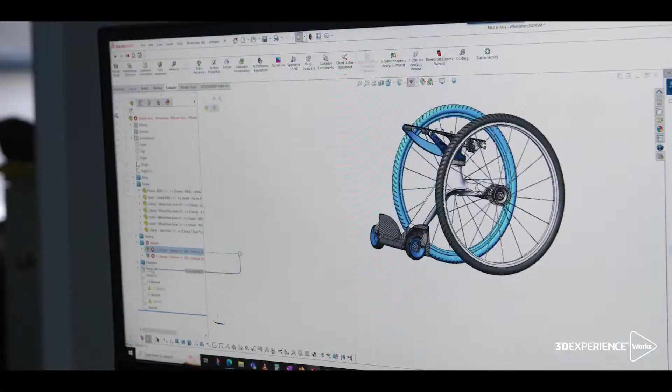Bowhead designers are passionate about taking you places that you've never been, or back to the places you yearn to reach again. A focus on amazing has propelled Bowhead from a business into an adaptive mobility movement.

To fuel this movement, founder and CTO Christian Bagg and his team use every tool at their disposal, and SolidWorks has been Bowhead's go-to solution from day one. As the company's grown, SolidWorks has scaled with them, playing a vital role in every aspect of Bowhead, from design and production to customer service and operations.

Using this incredible dataset, we're going to explore the new CAD features and 3D modelling tools available with SolidWorks 2024. So, if you want to improve your team's productivity by working smarter and faster with the latest SolidWorks CAD enhancements, watch the new capabilities covering everything from assemblies and parts to routing, structures, and even drawings.

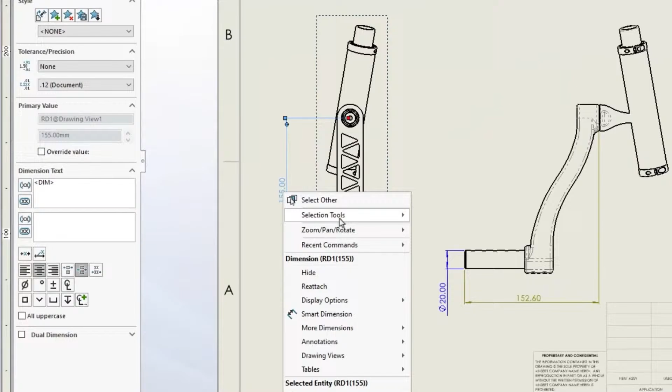SolidWorks 2024 has arrived.

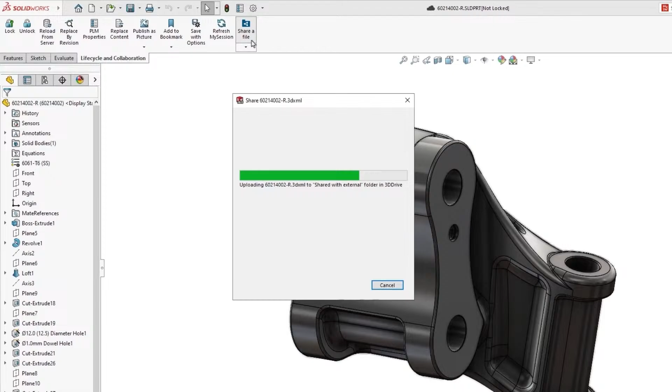With cloud services, there are convenient tools like Share a File that allow you to remove the friction associated with sharing your designs, both internally and externally. Simply indicate whether you'd like input on the design, who you'd like to share your design with, and the feedback you're looking for. No file attachments or viewers to download, just a notification with a link allowing controlled access to your content directly from a browser on any device.

Dimensions can be taken, sketches can be made on the model to communicate design ideas, and markups added from multiple views to convey manufacturing suggestions. When finished, comments capture the markup and can be used to request additional information.

The best part is that you never have to leave SolidWorks. You can access any comments and markups right from the task pane. They not only contain the annotations that were added, but remember the orientation of the model as well, making it easy for you to understand the feedback.

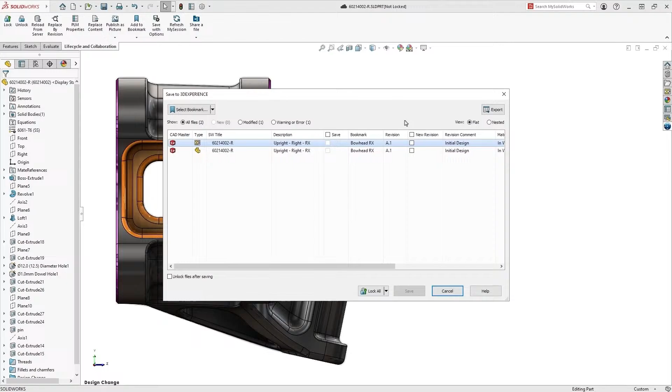When it's time to make design changes, Cloud Services has built-in revision management that's as easy as saving the model and drawing. Simply add a note indicating what's changing, and your new revision is securely saved to the cloud. On the drawing, the revision table automatically updates for you with your change comments. Plus, you can track the progress of your designs by simply updating their status. No need for moving files to new folders, zipping datasets up, or coming up with creative file names. Just convenient tools designed to make your life easier and keep you focused on your designs.

With the new revision available, you can choose to share the drawing as a PDF with your supplier, or update the existing share with the new design.

Either way, you're in complete control of the access. The 3D Experience platform is your online product development hub. Powerful search capabilities allow you to find and assemble your designs with ease, fully supporting your favourite features.

Such as mate references. When it comes to collaborating with your team, each member can lock the portion of the design they're working on, ensuring your design changes aren't accidentally overwritten. And because your designs are securely stored on the cloud, you can access them from anywhere.

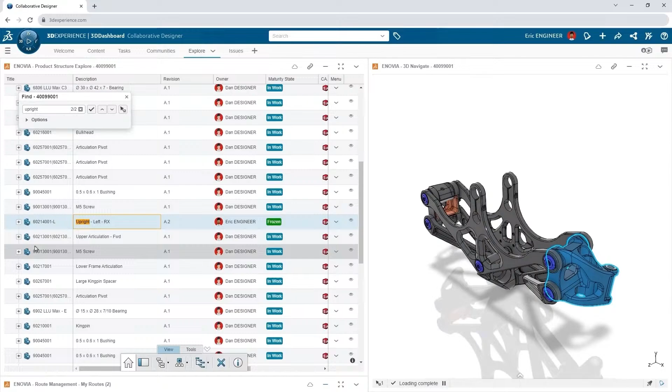Preview your designs right in the browser while taking advantage of powerful capabilities like comparing your design revisions. Explore the structure of your design with built-in search, allowing you to easily navigate to the component of interest. Focus on the part and access all the associated custom properties without ever having to open SOLIDWORKS.

When you're ready to bring more structure to your engineering processes, Cloud Services has you covered. Use the convenient tags to filter your designs by status and formalize your release process by dragging your designs into a route. Routes can have linear or parallel approval tasks assigned to members of your team.

Once the tasks are completed, you'll have full access to the sign-off history and the route will automatically update the status of the attached designs. Not only can you manage your approval process, you can also track and resolve design issues as well.

Unlike traditional lists, these items can be visualized right on the design. Location tags provide feedback on what the challenge is and who identified it. Detailed descriptions and recommended actions are outlined and can be updated with the action that was taken and the resolution.

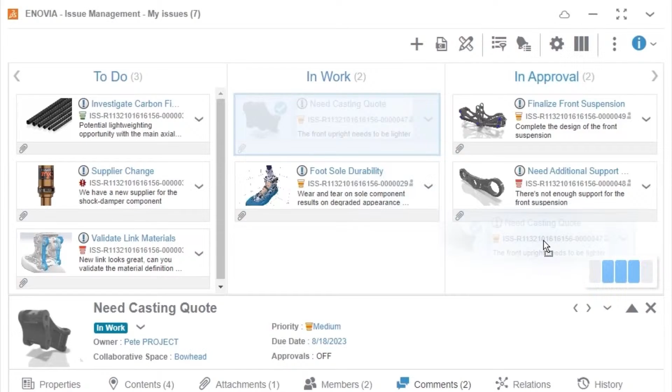The CAD items are referenced, and to ensure no one is duplicating work, the issues can be assigned to specific members of your team, and comments allow for social feedback that remains connected to the task at hand, not lost in an email. When completed, you can update the issue with a simple drag and drop and export a pre-formatted presentation to update your team in your next design review.

And that's just the start. Cloud Services opens the door to next-generation design tools, powerful simulation, and intelligent manufacturing that can accelerate your throughput. Keep your focus on design with Cloud Services, part of the 3D Experience Works governance portfolio, and available with new and upgraded SOLIDWORKS licenses.

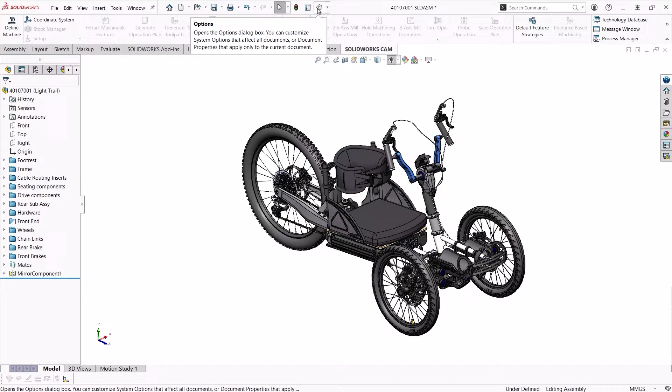To enable this option, we can open our options menu and on the System Options tab, we can select Performance. Finally, at the bottom of the page, we can activate the Hardware Accelerated Silhouette Edges. This option will help you accelerate the displaying performance of your models.

Another great feature added to SOLIDWORKS 2024 is that now you can select which coordinate system to use as your origin when saving an assembly or a part as a step file. To do this, we will open the Save As dialog box and select the step file type.

You can notice that a new drop-down menu has appeared where we can select which coordinate system to use as the origin for this new saved part. That's a huge performance increase for 2024, and being able to save as with a different coordinate system will really help when collaborating with other CAD systems.

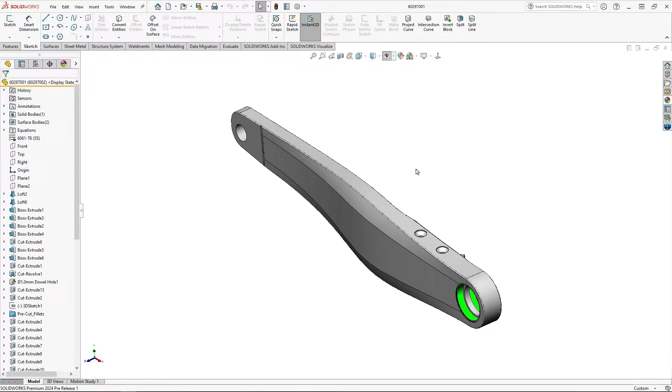In here we can select to save the part in either 2022 or 23 format. It's important to point out that if we were to save this part in a 2022 format, then this wouldn't work with any 23 or 24 new features used in the creation of our designs. That said, it still is an incredibly useful option when dealing with other SOLIDWORKS users who may be a year or two behind in releases.

When using the Cut Revolve feature, you can take advantage of a new option. We can now flip the side to cut, just like we can when using the Cut Extrude tool. This allows more flexibility when using sketched features by retaining the inner portion of a sketch and discarding the region outside of the sketch.

New in 2024, we're now able to create cylindrical bounding boxes alongside rectangular ones. These are super useful with bodies including cylindrical geometry, such as rotational, circular, or turned parts. Using this helpful new enhancement, we're able to take our new design and calculate the bar stock that would be required for manufacture.

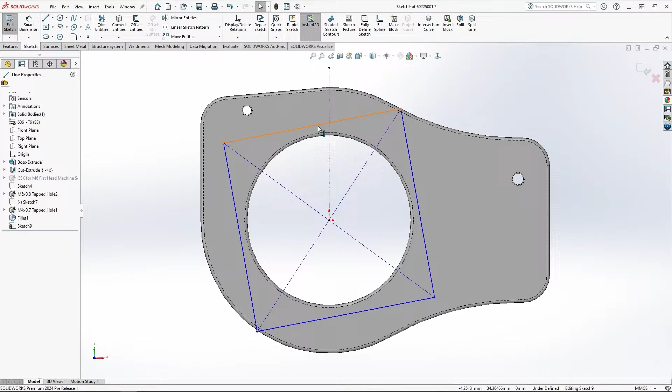There are lots of different ways that we can apply dimensions to our sketches to ultimately control them, but normally you have to first initiate the Smart Dimension command. Well, in 2024, we can now toggle a system option to preview the dimension whenever you select an entity. From here, you can simply use the manipulators for Instant 2D, or just double-click the value to change it.

This year, a really nice enhancement has been made to the Hole Wizard. When we go into the Hole Wizard and explore the Positions tab, we are greeted with an option to use an existing 2D sketch that already resides in the part. These sketches can be used to position and automatically create the holes at all endpoints, vertices, and points.

The sketch options specify the geometry used to automatically create the instances. The two options are Create Instances on Sketch Geometry, which is enabled by default. This will position holes at all endpoints, vertices, and points of the sketch geometry. The other option does exactly the same, but for construction geometry. You can also skip hole instances, making it super quick to eliminate unwanted copies.

Helpfully, if we were to delete a Hole Wizard feature, we can choose to retain the original hole position sketch.

At first, being able to make a multi-body part from an assembly might not be seen as that important. We already have the ability to utilise Save As Part, and even have assembly features that we can use. However, these have their limitations. For example, assembly features are relatively limited in the types of features you can actually use, and most are specifically for material removal.

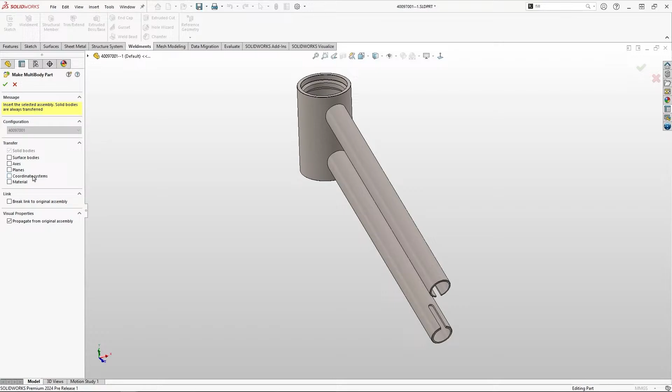Additionally, you can import the assembly axes, planes, and even coordinate systems, as well as the material of the bodies. In this particular example, by simply selecting the faces that we want to be welded together in our new part, the Weld Bead tool will create solid geometry to replicate the bead itself, and because it creates a solid body, we can see them in the cut list folder and can apply the correct material to them, allowing for an accurate weight for our assembly.

In SOLIDWORKS 2022, a great new tool called the Stud Wizard was introduced. This time-saving tool quickly turns cylindrical bodies into fully customizable stud features. Not only does it add the appearance of thread, but it also applies the correct PMI, or product manufacturing information, to the feature too. A nice improvement has been made this year by allowing you to apply the feature to a shaft that has the same diameter as the thread itself. In early releases, the thread diameter had to be smaller than the shaft, which made the workflow a little more involved.

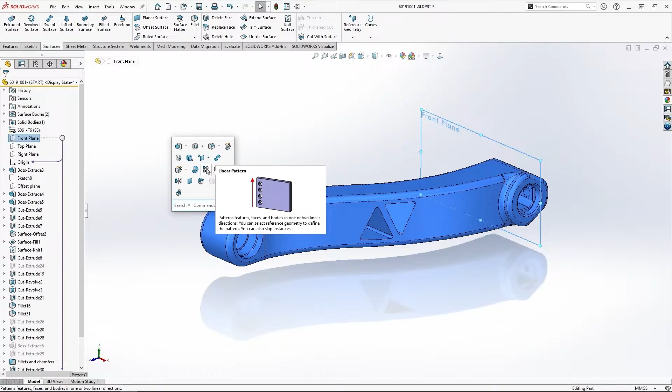Now for me, this is my favourite enhancement this year, in fact possibly for a couple of years. We can now create symmetric linear patterns just by ticking a box. No more selecting an additional direction, no more copying of dimensions or instance numbers, and no more ticking the pattern seed only toggle box.

Here, we're using a component from the bowhead assembly to show how easy it is to take a seed and then pattern it in two directions at once, but with symmetry. We'll first select the feature or features that we want to be our seed, in this case the weight-reducing pockets that we've removed from the part. We'll then select the direction of the pattern, followed by the desired spacing and instance numbers. Finally, we'll select the new option to include symmetry. By selecting this option, SOLIDWORKS creates a symmetrical pattern, but simply using direction 1 parameters.

When designing parts for moulding, it's often useful to have physical geometry to represent any shut-off surfaces. For example, here we want to capture the surfaces that would be required as a part of the tool design, as these triangular cutouts pass all the way through this part.

Previously, this would have been pretty difficult, but new in 2024, we're able to do this easily with a new option within Untrim Surface. Firstly, we'll create a copy of the front surface of this part by setting the offset to 0 within the Offset Surface command. Nothing new so far. However, this year, a new option to exclude the parent surface has been added to the tool, meaning that we can now create just those shut-off surfaces that we require with ease.

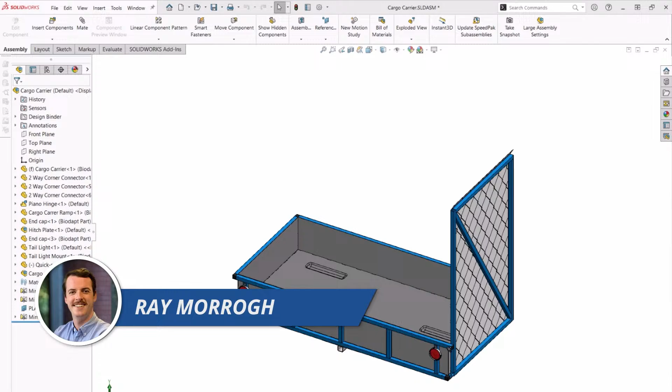There are some great new features in SOLIDWORKS Sheet Metal 2024. This cargo carrier attaches to the trailer hitch of a car or truck and can be used to haul the Bowhead RX around to nearby trailheads and rides. The entrance swings open and turns into a ramp so that the Bowhead can be rolled on and strapped down for transport. You can see that there is a diamond plate sheet metal liner with some indents for the wheels to sit in. Let's see how we use some of the new features of SOLIDWORKS Sheet Metal 2024 to help design this liner.

Taking a look at the liner, we can see that it's incomplete and still needs one of the side plates to finish the design. We are in an assembly and all of the sheet metal parts are connected using the tab and slot feature. Let's use Copy with Mates to copy the long side to the other side of the liner. We'll repeat this first mate and use the front and right assembly planes to finish mating this part in place. When zooming in, we can see that there are tabs from the copied part, but no slots on the adjacent sheet metal parts.

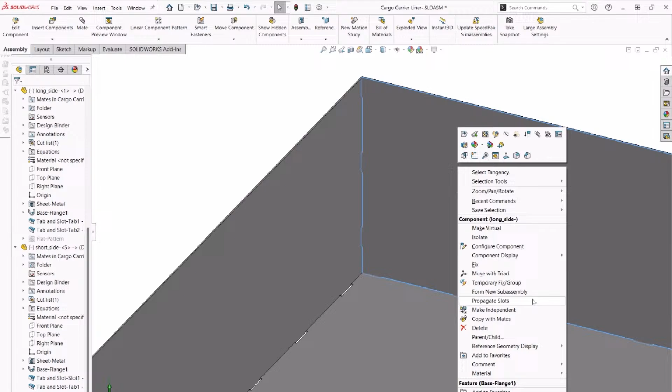Now in 2024, we can right-click the copied part and select the new Propagate Slots option. We can choose which slots to propagate or simply choose all instances. Now when zooming in, we can see that the slots have been propagated to the adjacent parts. This is a huge time saver, since we can now reuse the tab and slot feature in assemblies.

Now let's open the base plate and add the wheel indents. We can see that there is a fully dimensioned rectangle sketch already created. With it selected, we'll click the new Sketch-Based Stamp tool. We can now add dimensions to build out the dimensions of the first stamp.

First, we'll define the depth of 20 millimeters. Then we can make sure that the tooling can be easily removed, so we'll add a 5-degree outward draft. Next, we can control the die and punch radii of the tool. We'll set those at 20 and 10 millimeters respectively. Finally, we will turn on the punch side corner radius option and set that to 15 millimeters.

The new stamp tool is super powerful, and any closed contour sketch can be used to create stamps. In many situations, the stamp tool can be used instead of forming tools, which will save time and effort. There is another sketch in the tree, which is simply 2-dimensioned points on the base plate. Using a sketch-driven pattern, we can pinpoint the exact locations of the other 2 wheel indents and pattern the stamp.

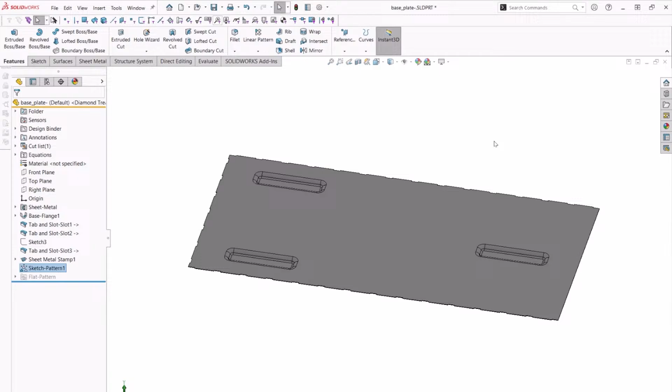Going back to the cargo carrier, we can see that there are two taillights that are mounted on the outer frame. Let's see how the sheet metal mount was designed using new functionality in SOLIDWORKS 2024.

This part is just an extruded, thin-walled cylinder. For this to be a flattenable sheet metal part, we would need to rip it first. Now, in 2024, the rip command can be used to rip thin-walled cylinders and cones.

Simply choose the rip command and click the inner edge of the cylinder. Clicking a point will define where the rip feature will be. The rip dimensions can be defined by a linear distance, or we can dimension it by degree. We'll set this rip cut to 3 degrees and choose symmetrical so that we know it is centered on the point. We also have the option to offset the rip as well.

Now, by using the insert bends command and choosing one of the inner edges of the rip feature, we can define this as a sheet metal part and see the flattened geometry.

By expanding the utility of the rip command, it is now easier than ever to convert thin-walled cylindrical and conic geometry into sheet metal parts.

Hiding the sheet metal enclosure will allow us to see the structure system in full, including the corner connectors. Here are some of the great changes that have happened to structure systems in SOLIDWORKS 2024. We'll create this structure system easily using these surfaces to gain our 2 rectangle elements.

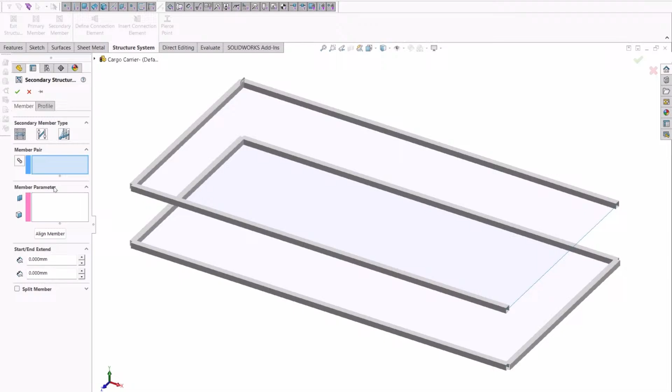Deselecting the edges will remove the associated weldment from being created. Secondary members are a breeze and only require a selection of the primary and secondary members and any planes that we may also want to build members with.

If we neglected to deselect previously, simply selecting the member profile once it's been created and hitting delete will remove that member from our structure system.

When exiting the structure system, we'll begin to notice some of the changes that have happened to structure systems in SOLIDWORKS 2024. The property manager will change to corner management.

We can now automatically apply corner grouping based off of a reference plane, like what we select here. In previous releases, we could group corners, but this was a manual process. It could be time-consuming working with a large weldment system.

There are several new UI elements, and we have a new option as well, Open Corner. This addition allows for greater flexibility when creating your new weldment structure, and the possibility of adding additional unique end connectors, besides the other options that have previously been available.

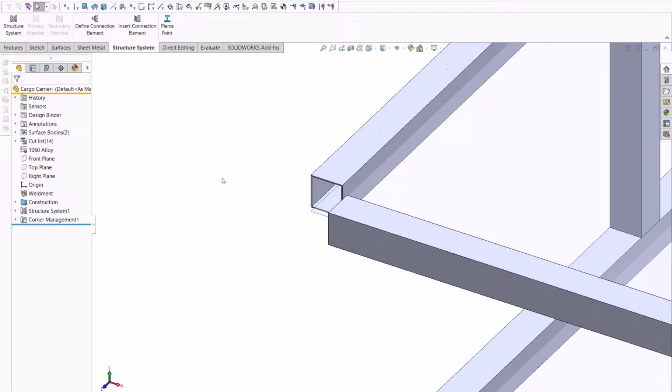Another great enhancement for 2024 is the ability to allow units for properties. Taking any items in our cut list and selecting the properties will allow us to add those units to our custom property.

This isn't just for bodies or members on our cut list, but will also be for file properties. A good example is the adjustment of the mass. Simply right-click and change the units in the property window.

We can now finish this weldment by mirroring several of the bodies from our cut list.

With SOLIDWORKS, it's easy to create complex weldments using more than just sketch lines, and Structure Systems has great tools to be able to do this quickly. That stamp tool is a huge time saver, much faster than creating a form tool, and great to see the tab and slot command now more flexible than ever.

Now, working with large assemblies gets easier every year, and this year is no different. To show you what's new in assemblies for 2024, let's hand over back to Graham.

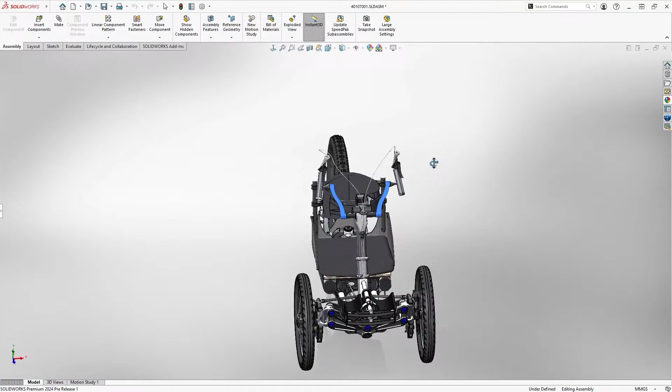SOLIDWORKS 2024 brings users more productivity when creating, organizing, and sharing assemblies. Let's take a look at the bowhead's front steering subassembly and check out some of the top enhancements.

For users that leverage configurations, configuration descriptions are now shown alongside the configuration name in the Insert Part pull-down menu. This helps ensure proper configuration selection every time.

SOLIDWORKS 2024 also adds a new option to fix, float, or fix the first when inserting a new component. This option is sticky and gives more flexibility to how you wish to work when placing components.

After selecting the green check mark, the steering knuckle is located at the origin, but in a floating state, allowing you to move right into position and start mating.

SOLIDWORKS offers many ways to create mates outside of the standard paperclip tool. Using Alt-Drag will automatically introduce a mate, or using Windows Control-Select will prompt the Quick Mate toolbar.

With each release, SOLIDWORKS is constantly evolving mates. 2024 has overhauled how the width mates are solved, and for advanced constraints, the width and tab selection fields have been renamed. In 2024, no matter how you select your tab or width selections, your constrained width mate will always solve correctly.

Predefined mate references offer another way to speed up assembly design, but sometimes can fall short of proper definition, and concentric mates are left free to rotate. Now, in SOLIDWORKS 2024, mate references have the option to be created only when a named reference exists, improving overall performance when placing.

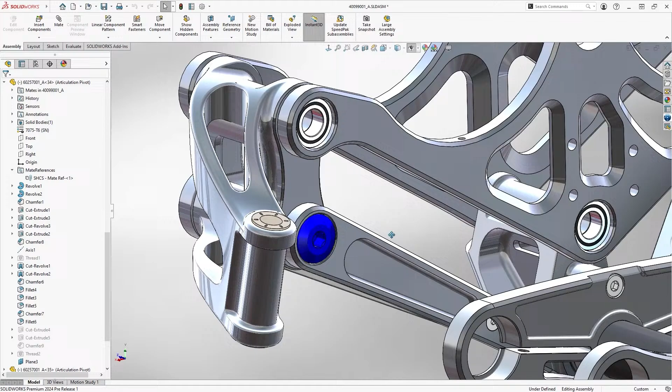An option to lock rotation has also been added for concentric mates. When adding a component with a named mate reference option selected, and where multiple paired named references exist, a drop-down list is presented with all possible options, making for precise mate reference placement.

With a total of 10 articulation fasteners added, it's time to clean up the assembly tree. Users have long had the option to add in component references, but this process can be repetitive. New in SOLIDWORKS 2024, component references can be accessed from the top level of the assembly, where information can be added, removed, or modified through a single table. Any duplicate inputs are flagged, and these component references can be leveraged in drawings, such as in a bill of materials or text callouts.

It's common practice to share files, and even more common to want to restrict intellectual property on the shared files. SOLIDWORKS 2024 now offers an even more streamlined approach to defeaturing models through a rules-based approach. Accessing a list of user-created rules, this particular rule looks at a custom property saved to the file and simplifies each part of the model accordingly through a silhouette defeature process. After less than a minute, the model is automatically defeatured and can be saved as a new configuration or as a new part altogether.

Not everyone is working on the latest build of SOLIDWORKS. Workflows such as saving out as a neutral file type, such as STEP or Parasolid, are common for backwards compatibility. That is no longer the case in SOLIDWORKS 2024. Assemblies, parts and drawings can now be saved back 2 releases. With previous release save, mates are retained along with configuration information, metadata, exploded views and much more.

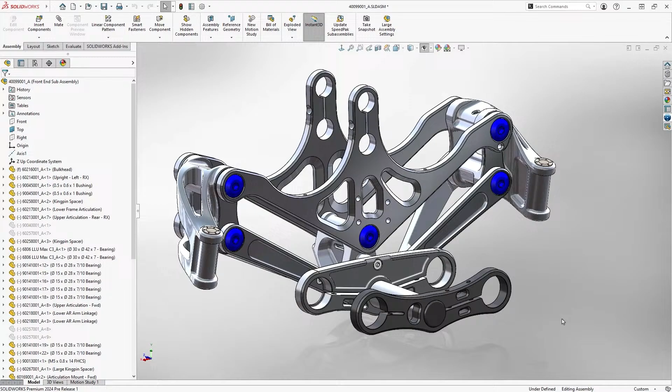SOLIDWORKS 2024 also incorporates XR or Extended Reality translators for saving CAD data to industry standard GLTF or GLB file formats. These formats can be consumed by many industry standard softwares to assist in composing AR, VR or XR experiences.

Importing STEP files is a common translation between CAD systems, but for large STEP files this can be a time-consuming process. SOLIDWORKS 2024 offers a new STEP file filter. This allows you to preview a STEP file and all of its components, then make selections of which files you wish to import and run the import, giving up to a 30% improvement on import time on translating large STEP datasets.

And finally, automatic mate repair has been expanded to include component patterns. Opening this rear wheel, we can see the spokes are now missing the edge that was initially used to drive the pattern. This can easily be cleaned up through the in-context toolbar and selecting the repair option. The process looks for a similar entity to reattach to the feature, allowing for a fast and efficient way to clean this up. A quick rebuild, and we're all done.

Whether it's day-to-day assembly operations, defeaturing files, or collaborating with older releases of SOLIDWORKS or non-SOLIDWORKS data, 2024 is sure to bring more efficiency to your assembly process. Some fantastic new assembly workflows available in 2024. These will really speed up large assembly design, documentation, and collaboration.

Let's see what's new for drawings. We'll begin by opening up the drawing for this mounting plate. Let's add some dimensions to this front view. Chain dimensions are useful for creating a stack of dimensions relative to each preceding feature. These dimensions now come in aligned collinear, reducing otherwise manual cleanup steps. In tight spots, where there may be overlap, a new system option automatically offsets dimension text.

On a busy 2D drawing, it can be difficult to tell what entities a dimension attaches to. Now simply hovering over a reference dimension will highlight its attaching entities, whether they be model edges, construction geometry, or vertices. This improves drawing clarity and helps you carry forward your design intent from the model to the drawing.

Sometimes you may need to manually override a dimension. That's easy to do right from the Property Manager. Any overridden dimensions can now be highlighted with a user-specified color. This behavior is controlled by Document Property. I'll use the document search to find it, and here it is all the way at the bottom of this screen. As you'd expect, the choice of highlight color is set as a system option.

Restoring one or more overridden values is easily done through the right mouse menu.

Collaborating with other SOLIDWORKS users who may be on previous software versions can be a challenge. It's now possible to save your drawings, parts, and assemblies back to prior releases. When you save the drawing, it will also collect any reference documents. Append a suffix or prefix, or use the advanced options for additional control over the file names and locations.

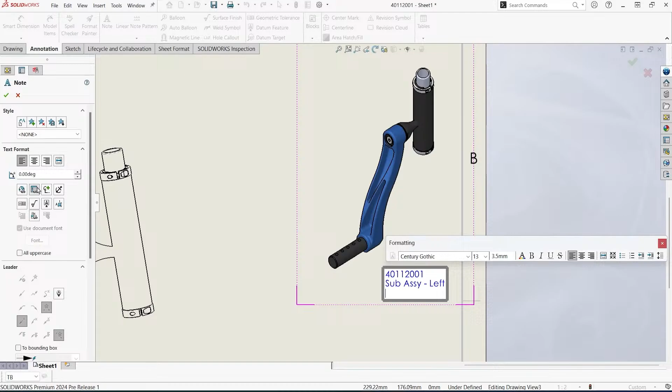I'll bring up my recent files list using the letter R shortcut and open up this subassembly drawing. I'll create a new note attached to this isometric view. For 2024, the link to the Property Manager dialog stays open so you can create text strings composed of multiple property links. This is a huge time saver for creating compound notes. And as you'd expect, when I switch the model configuration for this drawing view, the custom property information updates seamlessly.

However, changing the model configuration on these views causes a few of my reference dimensions to go dangling. Now you can simply right-click on any dangling drawing dimension and choose to reattach. The red X indicates an entity is missing, so now we just pick a new reference. Now my drawing is complete with a minimal amount of rework.

The latest release of SOLIDWORKS offers a number of enhancements to DimExpert and MBD. This part already has a DimExpert dimension scheme, but depending on model orientation, the attachment points of various DimExpert annotations could appear buried within the part. A new option in System Options Display enables DimExpert dimensions to display on top of the model. Now you can see the DimExpert annotations stay on top of the model regardless of the orientation. That looks a lot better and should eliminate any ambiguity.

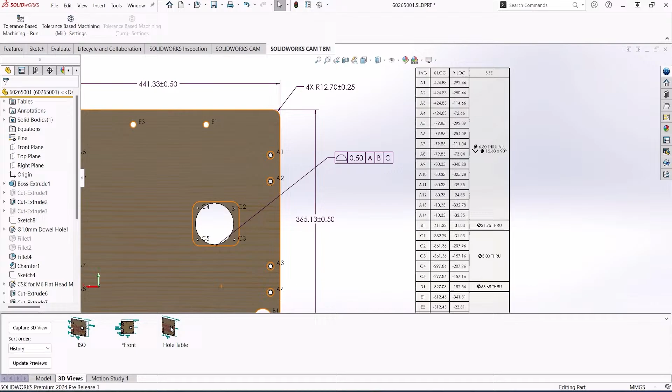Hole tables on 2D drawings are a popular way of reducing drawing clutter for multiple hole sizes and locations. I'll pick the front face to attach the hole table. Now I'll pick the X and Y axes, then these two faces to extract the holes. I'll choose to uncheck non-circular holes and slots, and then hit OK. Cross-highlighting from the table to the 3D part is also supported. When it comes time to save out a 3D PDF, hole tables will show in the 3D view, but you can also add a dedicated table on the PDF template.

Another benefit of MBD is the ability to create Step 242 output. This is a great format for sharing 3D data that has embedded PMI, which can be read downstream by software applications or used to program machines. New with this release, not only is the hole table included in the Step 242 output, but now you can also include any or all of the SOLIDWORKS custom properties for export.

Improving the editing interface for geometric tolerance frames has been an ongoing project for the past few releases. Double-click to select a tolerance frame, and then click again to bring up a Properties dialog. This release now provides the ability to display dual dimensions in geometric tolerance frames.

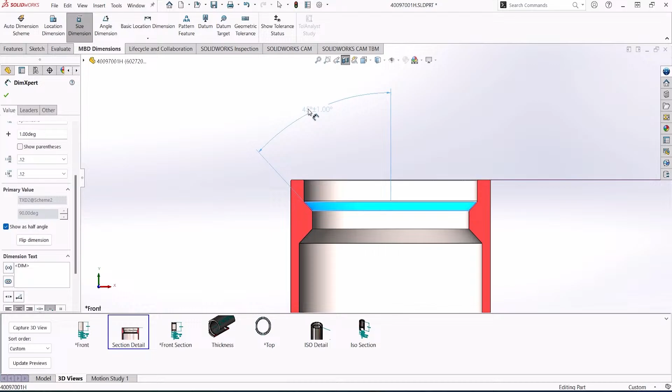Let's go to this section detail view. I'll add a size dimension to this angled face. I'll identify this as a conical feature, and this will create a dimension for the total included angle. What's new here is that we can now choose to display the dimension as a half angle. This is a more common convention, especially for turn parts. This behavior also applies if you use a DimExpert auto dimension scheme. For the datums, I can click on the existing datums in the model. Then select the angle dimension and set it to half display.

Also new for DimExpert is the ability to create a thickness dimension between two curved faces. It works pretty much like you'd expect. Switching over to this ISO view, I've added a split line to the top of this part. However, that causes this overall length dimension to lose its face reference. In the past, this would require deleting and recreating the dimension. Now, DimExpert dimensions can be reattached to a new reference entity, as long as it's of the same type. One last bit of cleanup, and this part is looking good. Much easier now to reattach those dangling relations.

If you frequently find yourself repeating the creation of models and documents, it may be beneficial to explore the use of DriveWorks as a design automation tool. This tool has the potential to streamline your processes and significantly accelerate your workflow.

We've seen some amazing new tools for design and documentation so far, and the good news is that there's still plenty more to come in the second half, including SOLIDWORKS Visualize, PDM, simulation, electrical, and some incredible new applications now available on the 3D Experience platform.

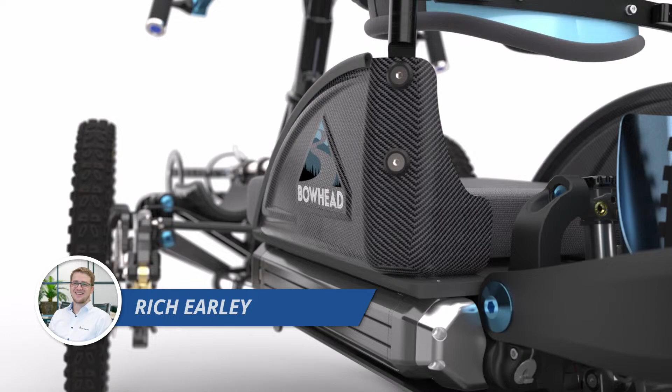Since its introduction in 2016, SOLIDWORKS Visualize has become a go-to solution for SOLIDWORKS engineers' rendering needs, creating photorealistic, engaging content directly from your CAD models. In this short video, we cover enhancements from the 2024 release, applicable for all versions of Visualize, whether using Visualize Standard, Visualize Professional, or Visualize Connected.

The biggest change for all users is the complete overhaul of the appearances, as the appearance format has been exchanged with Dassault Systèmes' Physically Based Rendering, or PBR, methodology. This approach is fast becoming industry standard within visualization and CGI, allowing consistent and seamless integration in both upstream and downstream visualization workflows. These appearances are created in a full DS-PBR model, allowing full controls to create complex and nuanced appearances. But that doesn't mean that the DS-PBR format is hard to use.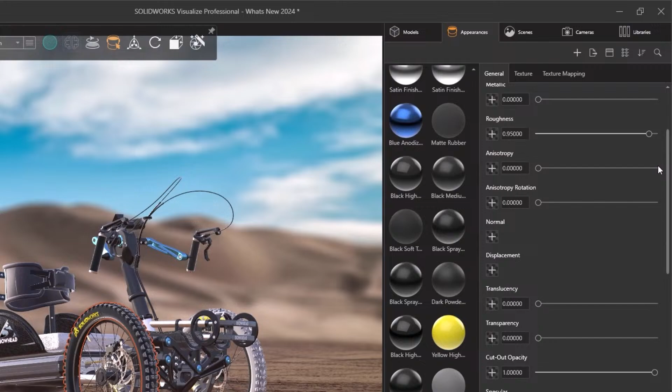Single texture maps can be simply dragged from Windows Explorer onto the appearance and pointed to a map slot. If multiple maps are selected, a format will reference common naming conventions and auto-load all maps to the correct slots for instant appearance application. Full control over textures and mapping is of course still present, with the addition of some delighters, such as simplification of the tint tool and basic image manipulation tools that allow for fine-tuning of the textures on the fly.

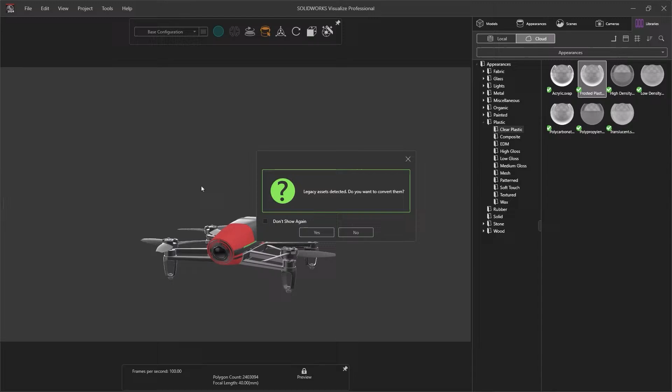Along with the appearance format change comes a whole brand new appearance library. This library comprises over 48% more appearances than the previous library, with more periodically to be added to the cloud library. If you created any existing custom appearance in Visualize, these will be automatically updated to the new file format as soon as they're used within Visualize 2024.

Setting up your scene can be a time-consuming process. Visualize 2024 dramatically reduces this with a revised manipulator. Graphically, the manipulator has been given a new clean design, featuring dynamic highlighting to ensure you select the correct translation, rotating, or scaling command. For power users, keyboard shortcuts have been added.

G, R, and E have been added, using G for grab or translate, R for rotate, and E for elongation, or the scale command. This can be taken further with additional keyboard shortcuts for the X, Y, and Z axis, represented by the respective letters. For example, we can translate this component in the Z axis by first selecting the G key, followed by the Z key for the direction.

This is then accessing the component's local coordinate system. However, at times you wish to select the world coordinate system. I will do this by simply double pressing the axis that you want to select. Complex scene setup should be even easier to create with the improved Move manipulator, with keyboard shortcuts adding quicker and more precision for users.

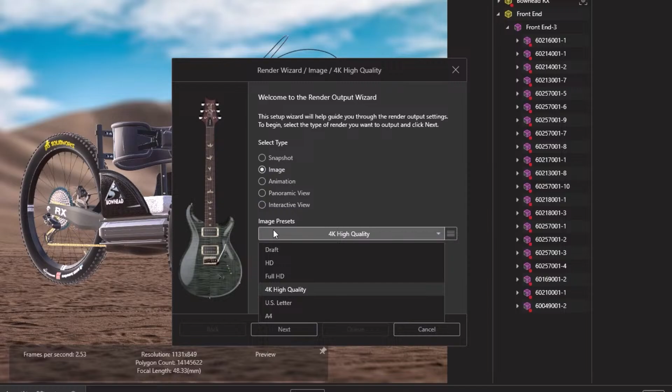The Output Tools menu has been replaced with the Render Wizard, an easy step-by-step interface with customizable output profiles. This includes all the same settings previously included, all within logically separated tabs. However, there's a few additional features that have been added. Now we have full control over which configurations, model sets, and even cameras we wish to render out, all within a single setup.

Export options have been added for interactive images, with the option to export animations, opening up all kinds of creative outputs for interactive feedback. These can be created from partial or whole existing animations. Interactive outputs can be previewed from the output viewer, as well as the option to directly upload them to the 3D Experience platform.

Sun studies have been a go-to method for creating realistic lighting conditions for a specific time, specific date, specific location in the world. This has been enhanced with the ability to choose a rotational vector by choosing either a component or rotating the visible compass. Any of these defaults can be saved as profiles, ready for reuse for the next project.

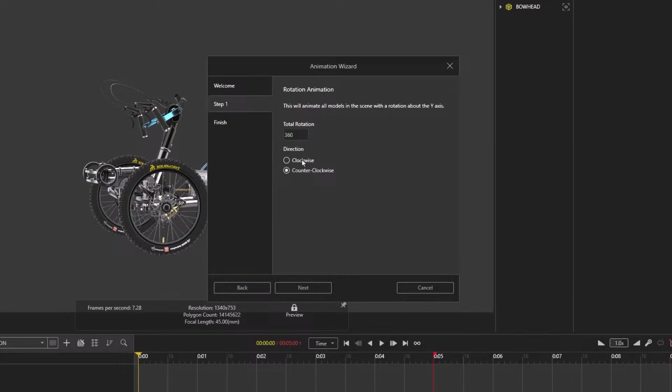Creating basic animations becomes even easier with the introduction of the Animation Wizard. From here we can generate automatic rotation, turntable animations, or even animate our sunlight environments, creating spectacular sunrises or sunsets.

This concludes the enhancements in Visualize 2024, bringing a host of tangible benefits, reducing the time taken to produce engaging content for sales, marketing, websites, and social media campaigns. Upgrade your Visualize 2024 today and bring your models to life.

Wow, Richard, Visualize looks incredible this year. The UI just got even easier to use, plus a lot more adjustments available for the more experienced user to create truly stunning visuals and animations.

Keep in mind that if you're looking to expedite your journey towards becoming a rendering expert, we provide training courses for Visualize as well as all of our products. Your design work is an incredibly valuable asset, so it needs protecting. With that in mind, let's hand you over to Terry to take you through what's new in SOLIDWORKS PDM 2024.

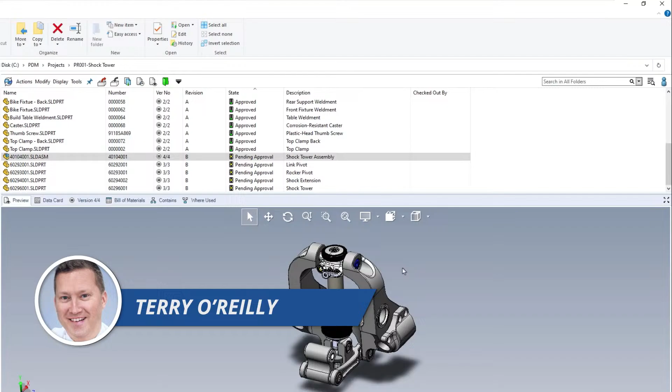Workflows have always been a great way to see where your design is in its development process. This assembly is pending approval, but needs to be transitioned back for additional features. Now in PDM 2024, when you transition a workflow, you have the ability to check out the design as you make the transition, making you more efficient.

Seeing a static list of parts and their properties can be insightful. However, with PDM 2024, we help you visualize those properties like never before. Assembly visualization now supports PDM properties. System properties as well as user PDM variables are now available.

Group and color by property, and then use the rollback bar to isolate parts based on their state. In addition, you can save the color mapping as a display state and continue working on your design with added insight.

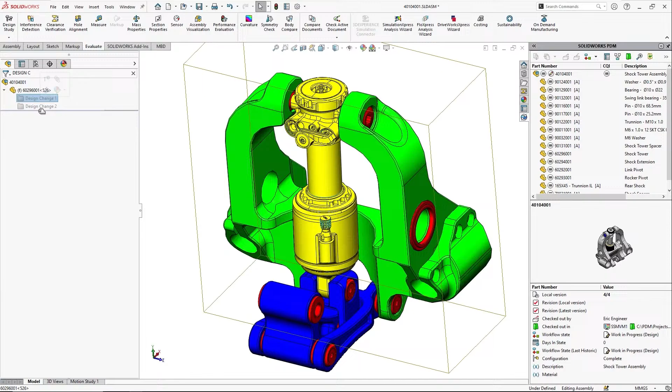Let's use the feature search to add the required design changes to this model. We'll finalize the design by checking them in and then release the design as Rev B.

PDM has always been about tracking the history of your designs. Now history records when the design has been checked out, providing a greater level of traceability. When accessing an old revision, you can now gain a clearer understanding of its status on the newly redesigned version tab. The top half of the tab provides insight into the status of the latest version available, while the bottom half provides you with information related to the current local version, giving you a clearer picture of the status.

For users of named BOMs, hidden columns now show in the BOM Compare as deleted. You can quickly unhide all hidden columns on the right mouse button menu, and it's easier than ever to edit multiple cells at one time. Overall security has been enhanced to ensure that reference data is blocked for those without permission on the Contains and Where Used tabs, and supports the table view as well as the tree view.

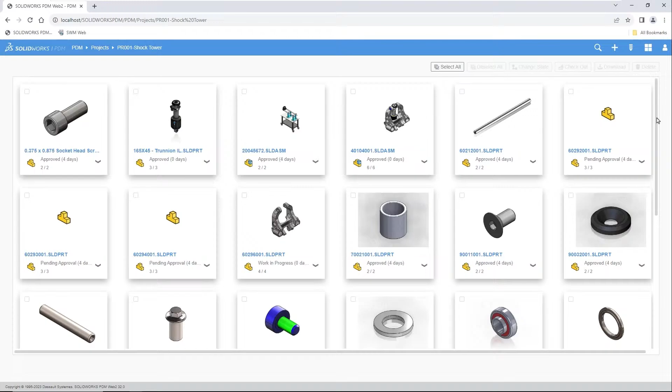Web2 now supports the grid view, making it easier to visually identify your designs in the folder and search views. Clearly understanding the makeup of a multi-body part is now easier than ever, with new icon indicators that exist not only in Web2 but throughout PDM 2024. The right mouse button menu allows you to seamlessly transition to any tab of a file, saving you time.

And if you need to access an old version, Web2 now allows you to select the version you want to download. For administrators, it's now easy to see the vaults that you're logged into. The license node has been split into license usage and server list, and a new administrative permission has been added for more granular access control.

With the introduction of assembly visualization support for PDM 2024, you can create variable display lists your users can access and easily control their permission.

Finally, organizing your workflow has never been easier. States that are no longer utilized can now be archived, and you can toggle the pane on and off on the toolbar. If you need to unarchive a state, simply drag and drop it.

With SOLIDWORKS Manage, you can create and edit bills of materials using a record-based approach, making you less reliant on the existence of SOLIDWORKS data. You can create a bill of material at any stage of product development and capture a manufacturing BOM, which is often derived from the CAD BOM but is different in some way.

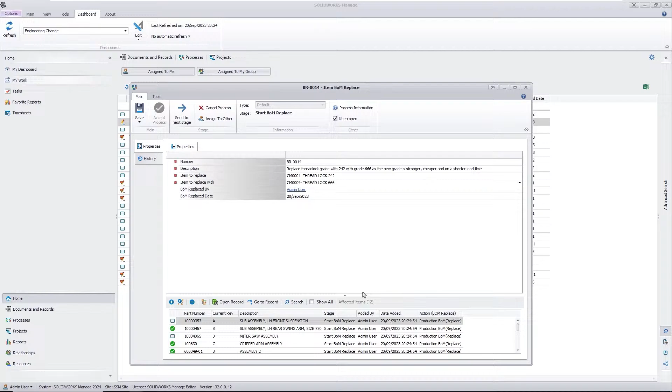In 2024, you can globally replace an obsolete component with an alternate part and update all its parent bills of material in one operation. In 2023, the bills of material are updated one at a time, so this great new enhancement is going to save significant amounts of engineering time.

In 2024, the SOLIDWORKS Manage desktop and web client includes a full eDrawing preview, making it much easier and faster to view component geometry whether you're working with bills of material or participating in an engineering change process.

With SOLIDWORKS Manage 2024, these enhancements and many more will improve ease of use, increase productivity, and promote better collaboration across your organisation. Some great enhancements to the user interface this year.

Lots of additional functionality for BOMs, transitions, and now support for assembly visualization. And that added checked-out-by information in the file history gives us an important new layer of traceability.

Simulation is an important part of the product development process for many companies. So to take us through this year's enhancements to SOLIDWORKS Simulation and Plastics, let's hand over to Alex.

SOLIDWORKS Simulation 2024 adds additional functionality to virtual connectors and options to speed up your simulation setup. We'll start by looking at the new simulation options that will help every user.

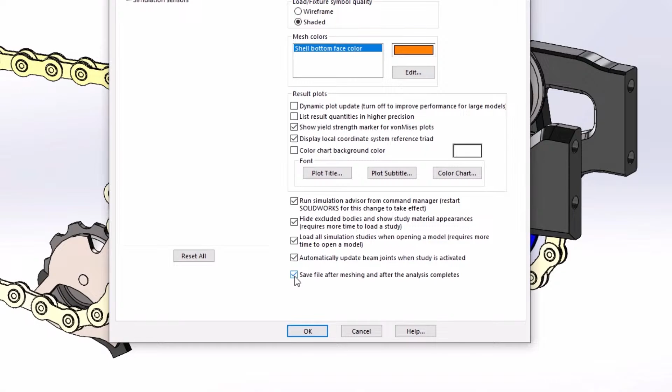In the general simulation options, you can now turn on new selections to automatically save the file after meshing and automatically save the analysis after the analysis completes. This is now in line with the behaviour of SOLIDWORKS Flow Simulation. These options will prevent data loss in the case of unexpected shutdowns or power cuts.

Also, under Solvers and Results is a new option to pick and choose what is copied, either include or exclude the mesh and results. This will save time and disk space.

Now, back to the model. This chain assembly is responsible for transferring power from the rider's arms to the assistive power unit and rear wheel of the Bowhead RX. You can see there are two chains running through the tensioner. Next to the chain is the chain roller guide. The roller guide is responsible for keeping both chains on the transfer cogs, ensuring that the chain doesn't slip off under power.

In this simulation, we're going to check the displacement around the roller guide and check the bearings and bolts are fit for purpose. The chain roller guide is mounted to the tensioner mount and houses two sealed bearings that are mounted to the roller guide axle.

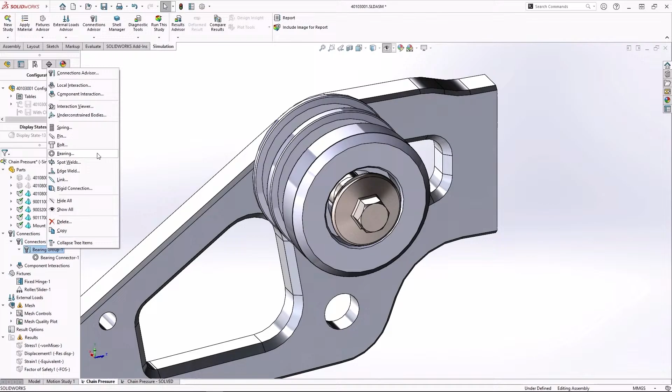We can now exclude the physical geometry for the roller bearings from the analysis, since we're replacing these with bearing connectors. One of the bearing connectors has already been created for us, so we'll now create the other connector. We will choose the outer face of the shaft and the inner face of the housing to define the location.

We can now choose the new option for distributed coupling. Distributed coupling allows for the faces of the attached bearing to deform, which delivers a more realistic representation of the bearing's behaviour. We will now add the lateral and axial stiffness of the bearing to define the new tilt stiffness.

In 2024 is the ability to define torsional stiffness as well. In this final dialog box, we can also specify exactly how much the shaft is going to be stabilised.

Now we'll add the chain loads to the roller guide. Split lines we use to locate loading at specific locations and directions. First, we'll use a load of 250 newtons to the hand crank chain and 150 to the pedal assist chain.

Next, we will quickly run this study. It takes under a minute to mesh and complete. So, let's take a look at some results.

You can see from this stress plot that the majority of the higher stresses take place on the bolted shaft, but everything appears below yield and within tolerance.

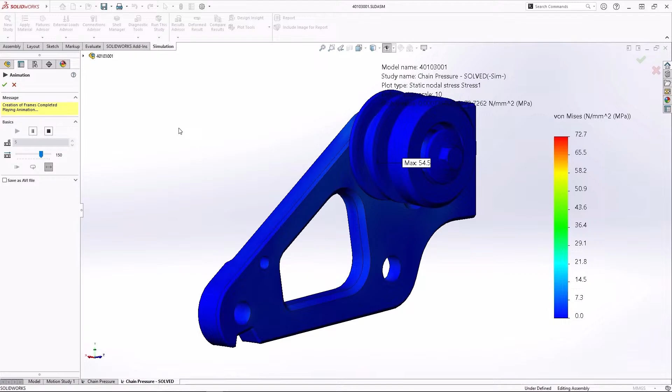When animating the results, we can see that the chain roller guide is moving as we would expect, and the deflection suggests that even under load, it's relatively mild, so the chain roller is doing its job.

These new enhancements to SOLIDWORKS Simulation in 2024 add even more flexibility to how you work and even more power to commonly used virtual connectors.

Copying studies is now faster than ever before, saving time by removing unnecessary data transfer. And adding even more detail to bearing connectors saves runtime and helps you get even more accurate results than ever, and greater insights into your design.

In 2024, SOLIDWORKS Plastics uses automation to speed up your analysis. We also have further injection location optimization options.

This plastic part supports the rider's calves when powering the Bowhead RX. It's a thin plastic part and it may be beneficial to have multiple gate locations to reduce cycle time and ensure proper mold cavity filling.

Now in SOLIDWORKS Plastics 2024, the Injection Location Advisor can automatically suggest multiple gates and their optimal locations. Users can also define the number of gates to use, and the advisor will then place those gates in optimal locations as well. On screen we can see a preview before we run the study of how this may look.

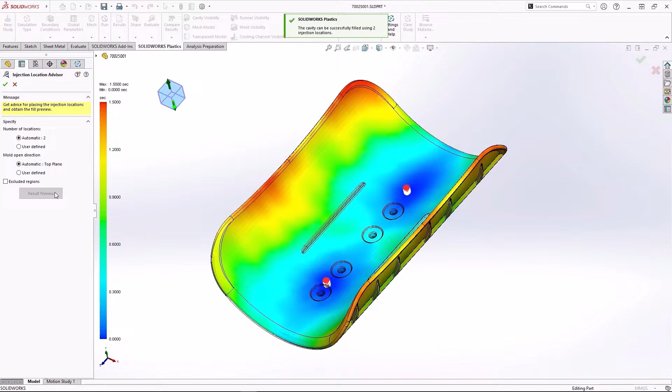Now, let's say you have another part like this cable cover, and you want to test multiple scenarios with different materials and different study types. The new Batch Manager makes it easier than ever to queue up a bunch of studies and run them all with one click. In the Batch Manager, you can now also choose what study type you want to run.

First, we select the right study setup. Then, using the new Simulation Type pull-down menu, we select the relevant option. You can choose any combination of fill, pack, warp, or even cool studies.

You can even designate the maximum number of CPUs for each study. This allows you to crack on with other tasks and not have your whole CPU used up by a plastic simulation. You could even start a second session of SOLIDWORKS and do some modelling while the studies are running.

When you're done setting up the Batch Manager, simply hit Run, or you can even choose a start time. In SOLIDWORKS Plastics 2024, we continue to use more automation tools and logic to help you get deeper insight into the injection molding process of your plastic parts.

Automatically saving the file after meshing and after the analysis completes gives us an added safety should things go wrong, a potentially huge time saver. And the new connector options add an extra level of realism to your analysis.

If you're uncertain about having the necessary skills and time to meet your simulation requirements, consider utilizing our consultative service. This service can be a valuable resource for one-off assistance or for reducing both the workload and costs associated with your project.

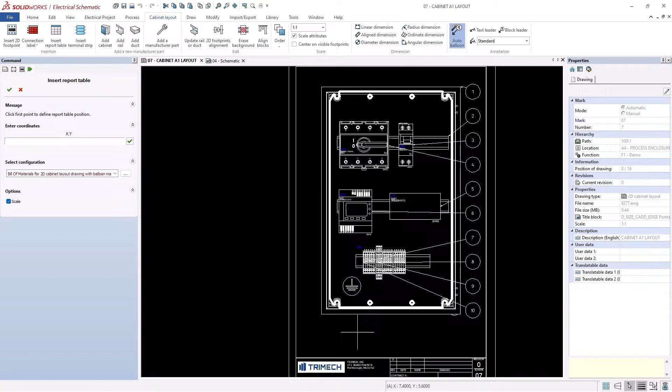And then we have the option to insert the report table as well. So I'm going to go ahead and insert this table at the bottom here. When looking at this table, we can see there's plenty of information here, including manufacturer part information.

Now we can save some extra time because SOLIDWORKS has made it so we can delete manufacturer part information, and that will fully clear residual terminal numbers at the component level. So we'll save some time when we're clearing manufacturer part information.

Another update SOLIDWORKS has included for us is representing component marks as a range in our reports. So what do I mean by this? Let's look at the table we just inserted. We have our manufacturer parts here, and we have our quantity and marks.

When we have a quantity count of 3 or 1 or 2, it's easy to fit the marks for those components in this single cell. But when we have something like our WAGO 1201 terminal blocks with 17 of them in there, each individual mark for those 17 iterations is going to expand the cell or change the whole format of the table.

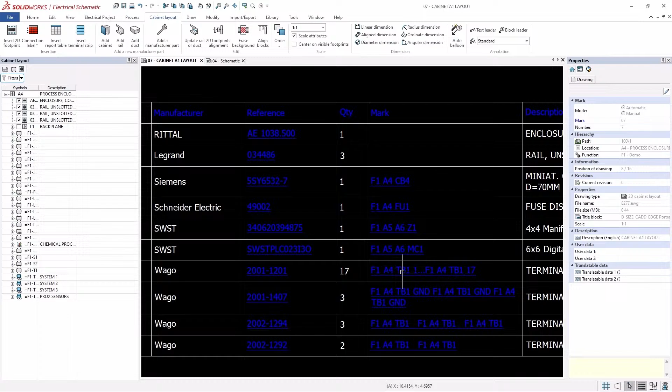The way we can represent this as a range is SOLIDWORKS has included an ellipsis to represent a gap between the first and the last iteration of those terminal blocks. So this makes it easy to format, and it makes it easy to understand and follow all the different marks in this table.

Let me open up a schematic and show some of the changes here as well. So we have a schematic here that represents our harness design, with connectors and wire harnesses or cables in between. One update SOLIDWORKS has made is being able to move symbols using the arrow keys on the keyboard. Now I can move up, left, right, down, adjusting how my symbols are arranged using only my arrow keys. That's a new function SOLIDWORKS has made easier for maintaining and modifying our drawing orientations or schematic layouts from within our keyboard shortcuts.

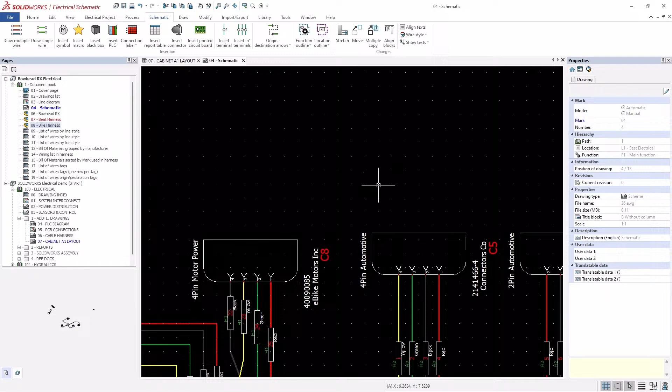One thing to take note of as well is as I zoom in and zoom out, my grid does a much better job at auto sizing. SOLIDWORKS has made improvements to that, especially making it easier for when we're working on larger displays. Having that scaling much quicker and more intuitive is definitely helpful when referencing our drawings and schematics.

Now let's take a look at the 3D updates for our electrical project. Here we can see an arrangement of connectors for electrical harnesses. The first update I want to show is routing active location only. In the electrical tab, we can see the location L2 and the components included in this location. When we automatically route that harness, we can select the option to only route the active location.

Let me go ahead and go to my route harnesses. From within this feature tree selection, I can choose to route active location only. When I do that, it's going to focus only on location L2 that I have active, and route that accordingly. Now we can see that this harness has been routed for us, following that path for our location L2, and we notice that this other harness was untouched - it didn't change, it wasn't moved, it wasn't rebuilt, because we focused primarily on location L2.

The next update in 3D is to filter components or manufacturer parts in the feature tree. If I go to my electrical tab, I have a new filter for manufacturer parts. I can choose filtering by association, accessory, auxiliary, or even manufacturer parts that are excluded from the BOM. When I use that, I can toggle this filter on and off, and it's going to apply those changes for me.

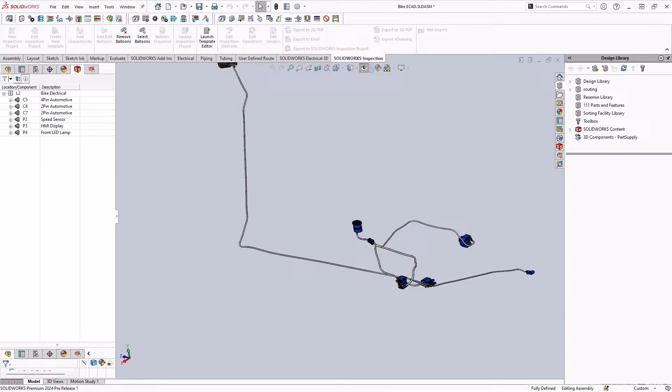Some great time-saving new features in SOLIDWORKS Electrical 2D and 3D to help you work faster and become more productive, while bridging that gap between the mechanical and electrical design teams.

Now, the 3D Experience platform opens up a world of new technology to users, and to introduce us to a selection of next-generation design applications, we'll now hand over to Sarah to show us more.

Your SOLIDWORKS designs are always evolving, and when inspiration strikes, your ideas can't be limited by your CAD system. 3D Experience Works unleashes your creativity and brings your ideas to life with next-generation cloud-based tools for freeform subdivision surfacing, traditional parametric modeling, algorithmic design, and more. Everything you create seamlessly integrates with your SOLIDWORKS designs. Built-in collaboration tools make it easy to share ideas and feedback, document and mark up design issues, and stay organized with team assignments. Watch and see how you can expand your 3D modeling toolbox to enhance your SOLIDWORKS experience and unlock endless design possibilities.

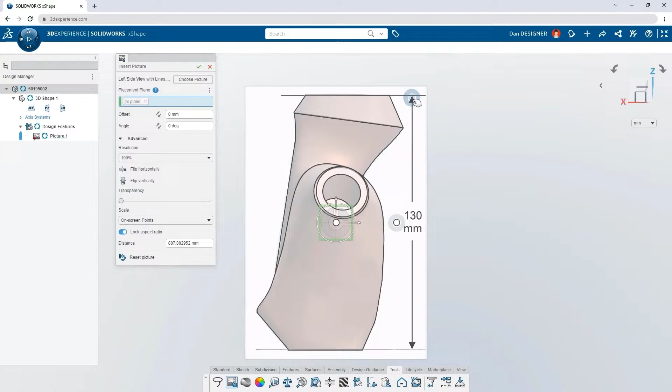Subdivision modeling begins with a primitive shape. Start by adjusting the size and mesh parameters. Use the manipulator to push and pull the surface like digital clay. No need to spend hours creating sketches and surfacing features. Snap entities to a line and then click and drag to adjust the endpoints. When you need more detail in your surface...

Subdivide or extrude faces, or insert entirely new edge loops. Add creased edges to your surface for style or function, and adjust their smoothness and severity.

When you're modeling from 2D sketches, you can jump from one profile to another to make adjustments. Align your surface to a curve by drawing on screen with your cursor.

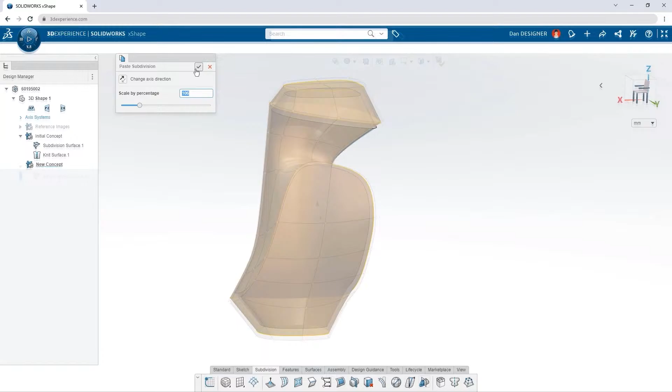Copy and paste previous surfaces to explore new concepts. Scale them if you need to, and then continue sculpting. Use the Reflect tool to create a mirrored copy of your subdivision surface. Jump into a section view while modeling, and don't forget to check for manufacturability with draft analysis.

When checking the quality of your surface, use Mesh Inspection to identify intersecting elements. The cage view shows the mesh from which the curved surface is generated. When you need to focus on a portion of the surface, isolate it with the working zone, so the rest of the model is left untouched.

As your surfaces become more complex, use soft selection to affect more vertices at once. Adjust the radius of influence to sculpt only the areas you need.

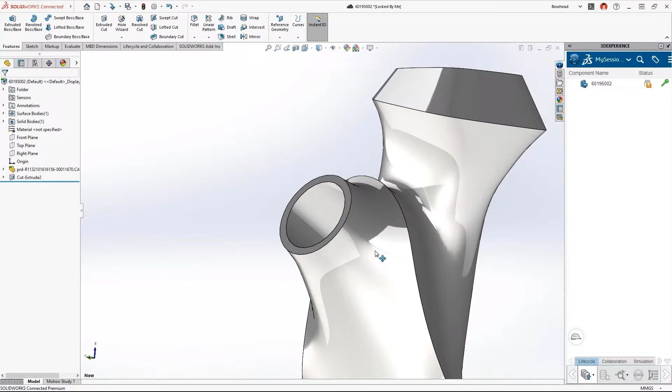Flatten areas of the surface to be used as sketch planes. Take advantage of parametric features from XDesign, or bring your subdivision surface into SOLIDWORKS to add similar details. If you decide to stay on the cloud, monitor your performance from the system status.

Switch from a fillet to a chamfer on the fly. Skip the sketch and start from extruding faces. With super features, you can toggle between extrude, revolve, and sweep. You can even stop and make a new sketch while in the middle of a command.

Leverage both cosmetic and physical thread options for holes and studs. While thickening faces, any problematic areas are highlighted so you can adjust your surface or thickness accordingly.

The single modeling environment allows you to create new components from features or bodies and makes rearranging your components and subassemblies simpler than ever. When your model calls for it, seamlessly switch to other cloud apps for different types of design.

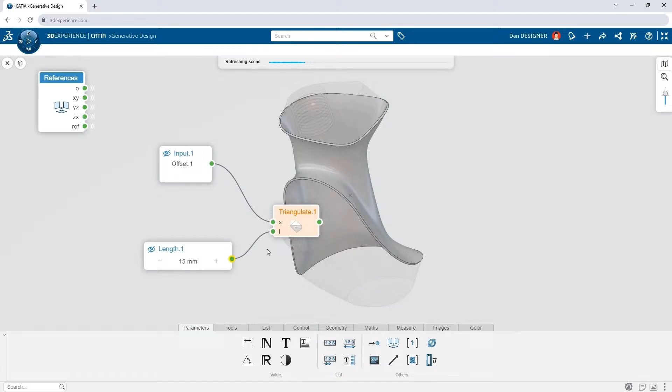xGenerative Design takes an algorithmic approach to modeling, combining interactive 3D geometry and visual scripting. Use operator boxes to quickly generate complex patterns and see your model evolve. If changes are ever needed to the original geometry, patterns update automatically.

Use the built-in lifecycle tools to explore and organize the revisions and branches of your design.

Prepare prototypes with integrated additive manufacturing tools. Connect to a cloud machine or input custom metrics to match your machine's build volume and technology.

Visualize the support required according to overhang thresholds specific to your 3D printer, and anticipate level of detail with a custom layer height preview. Export in the latest additive manufacturing formats to go from digital model to physical product.

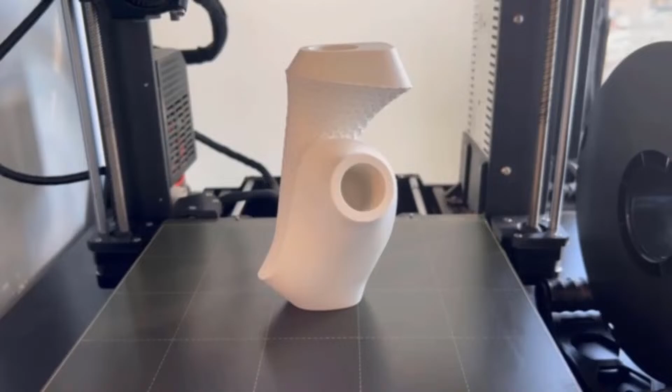Subdivision modeling is great for this type of ergonomic design, but you can also use it to add style to structural components. Use the Flex command to taper your surface along a direction.

Align your surface to a sketch or curve in the model. Go from box selection to lasso and align vertices to one another. Use Boolean commands like combine or subtract for multi-body workflows.

Add holes to your model from a vast library of standard sizes. Your favorite parametric surfacing tools are available when you need them, but you could also use sketches to define a subdivision surface, then sculpt it into your desired shape.

Take advantage of other applications like lattice design to create lightweight components while retaining structural integrity. The Lattice Design Assistant walks you through the process step by step.

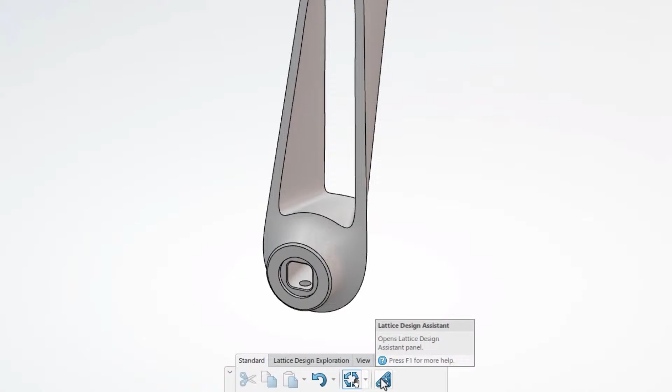First, specify the area for lattice generation. Then select the type of lattice you want to apply. Create your own cell structure or choose from a pre-loaded menu. Adjust the size, shape, and orientation of your lattice and generate a wireframe preview.

You end up with a custom polyhedral merged with your original geometry. And once again, the built-in lifecycle tools help you stay organized as you experiment with different lattice designs.

When it's time to update your assembly, replace any component with a new part or revision, search for other components, and drag and drop them into your assembly. Start selecting faces to add mates between components.

Mirror components across a plane to create a symmetrical copy. Drag and drop fasteners to add mates on the fly.

Artificial intelligence predicts the placement of similar components and mates them in place. You can see when your teammates have locked a component in your assembly and request their release without leaving your modeling session. Use your mated assembly to visualize real-world motion in your designs.

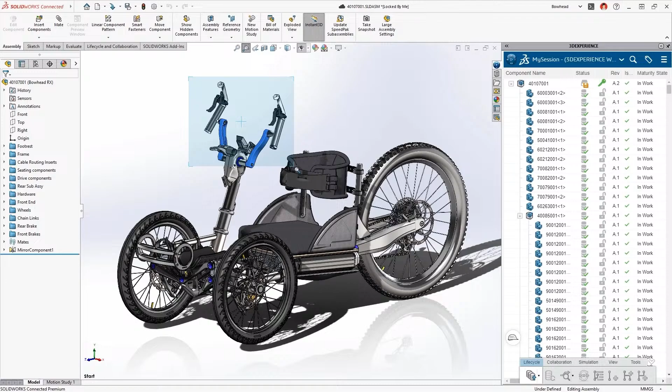Anything you create with these cloud design tools seamlessly integrates with your SOLIDWORKS models. Attach your model as a deliverable so your team doesn't have to go searching. And let your manager know that your work is ready for review by setting it to in approval.

With 3D Experience Works, you can complement your SOLIDWORKS design process with next-generation cloud-based tools for all types of 3D modeling. How will you unleash your creativity and bring your products to the next level?

That's some incredible technology we've seen so far, and it's all available right now. X-Shape makes light work of organic shapes with its subdivisional design tools, so much faster than traditional design methods. I'm sure you all agree.

Whether you're creating complex patterns on difficult geometry or looking to create ultra-lightweight structures while retaining structural integrity, the 3D Experience platform provides tools to make these design tasks simple.

Now that we've seen next-generation design tools available on the 3D Experience platform, it's time for Tom to introduce us to the next generation of tools built for simulation.

Your SOLIDWORKS designs are always evolving, but how do you know if they're going to work? 3D Experience Works Simulation, powered by the industry-leading Abaqus solver, gives you the ability to virtually validate complex designs while minimizing the need for physical prototypes. Built-in collaboration tools make it easy to document and track issues in your design and manage and coordinate your tasks with your team. Let's see how you can use multi-physics simulation to analyze different areas of your design and ensure your customer gets the best product.

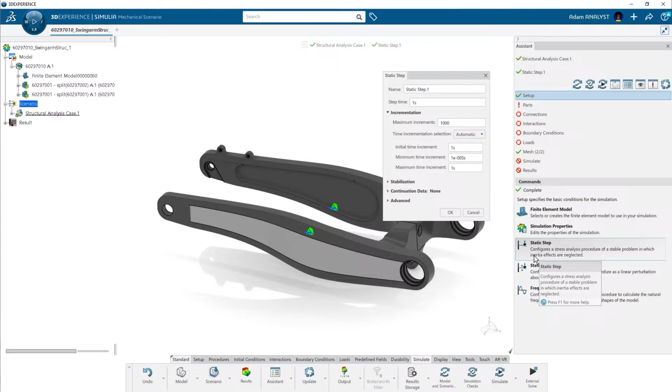The Assistant panel makes it easy for you to set up simulations. You can select a material from the comprehensive library and apply boundary conditions and loads to replicate real-world scenarios. Once the results are generated, you can view a variety of different plots, such as factor of safety, to validate your changes.

Designs often experience different types of load that require different types of simulation. For example, we can investigate the effects of dynamic loading, such as random vibrations, using a random vibration study. It's easy to define the bounding frequencies of the analysis and characterize the loading of the PSD curve.

Stress and displacement results give you insight into how your assembly behaves during random excitation and gives you the confidence you need to move the best design forward. Sharing your designs and working with your team is easy with the built-in collaboration tools.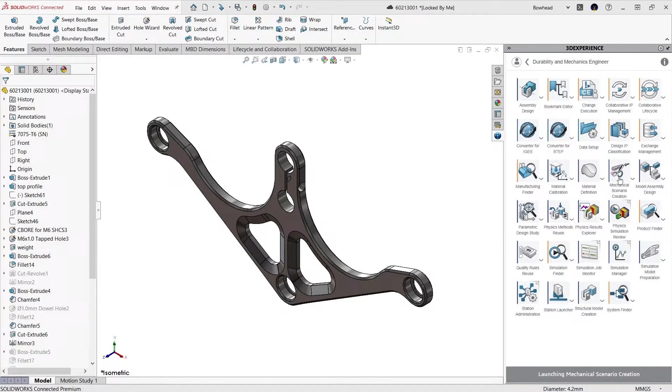Sometimes a linear static simulation is just not enough. Cyclic loading can create fatigue-related failures that are hard to predict. Now, with 3D Experience Works Simulation, you can easily and more accurately validate the lifespan of your parts and assemblies.

The built-in material library allows you to select materials with comprehensive fatigue data, or you can create your own. You can define boundary conditions and apply loads, and the on-screen graphics let you know that the forces are going in the right direction. The results show when and where your parts will fail, even for low cycle fatigue.

With tight integration between SOLIDWORKS and 3D Experience Works Simulation, you can easily make design changes and rerun the simulation without having to import and export different file types. You can compare results and see how informed design changes can maximize the lifespan of your parts.

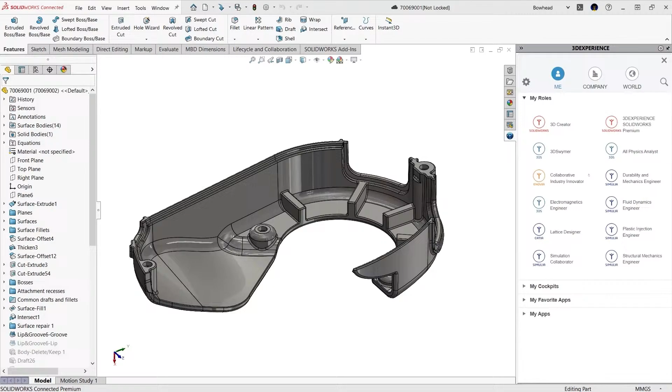Understanding how plastic flows in mold cavities is critical to the quality of your injection molded parts. Historically, years of experience has been the only way to avoid costly defects and tooling rework. 3D Experience Works Simulation puts powerful plastics analysis tools into the hands of your engineers.

You can apply materials from the built-in, comprehensive, and continuously updated plastics library and set injection molding parameters. The setup tools allow you to automatically find and establish gate locations, or you can specify your own. Right away, you can see some heavy sink marks, which are not desirable in high-quality parts. This insight helps to guide your design decisions to ensure optimal surface quality and maintain design tolerances.

When the plastic cools, it shrinks and warps, and you need to know by how much. With sophisticated warpage calculation, you can now accurately adjust your design to maintain fit, form, and function. Validating your plastic components eliminates costly and time-consuming mold changes and gives you the confidence to enter high-volume production.

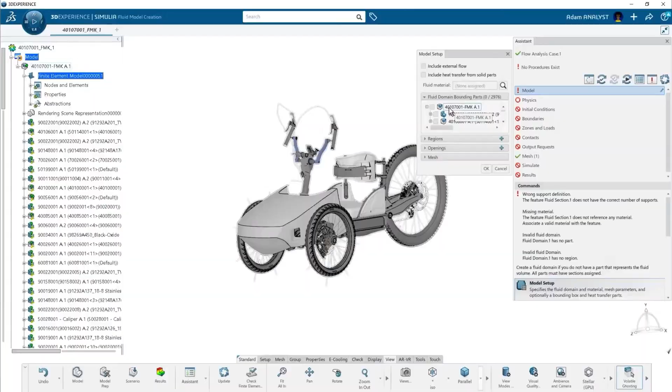When streamlining your design for better aerodynamics, you want to understand how air flows around it. Powerful fluid dynamics capabilities within 3D Experience Works Simulation allows you to easily define the boundaries of your study, set the wind speed, and use powerful hex-dominant meshing to accurately mesh complex assemblies.

The high-power cloud computing allows you to easily scale your resources to tackle complex simulations. You can explore flow velocities, pressure fields, and streamlines to help you validate the fluid behavior in and around your design, so you can maximize the battery life and increase rider efficiency.

More and more devices are connected through wireless technologies like Wi-Fi, Bluetooth, and cellular networks. Connectivity performance is a crucial design aspect of electromagnetic devices. Powerful CST Studio Suite technology, available within 3D Experience Works Simulation, allows you to simulate placement of such devices when they come into contact with each other.

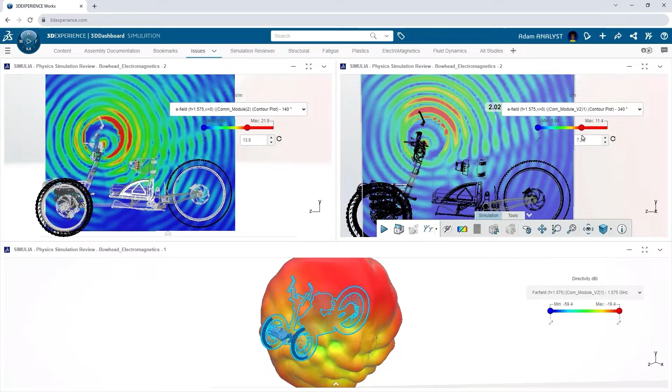By reviewing far fields and electric field plots of different positions and orientations, you can make informed decisions on how antenna placement and materials can affect connectivity. This enables you to visualize performance and optimize signal integrity.

With 3D Experience Works Simulation, you have the power to solve complex design challenges. Fueled by the industry-leading Abaqus solver, you have access to powerful multiphysics simulation capabilities that allow you to virtually validate your designs and confidently move forward with your best ideas.

Impressive stuff. With these powerful new tools, we can learn even more about our designs to help us develop, validate, and ultimately improve our products. When the design work is done, it's time to make those ideas real. The 3D Experience platform provides a host of applications for manufacturing, and to introduce you to these incredible new tools, let's hand over to Sawyer.

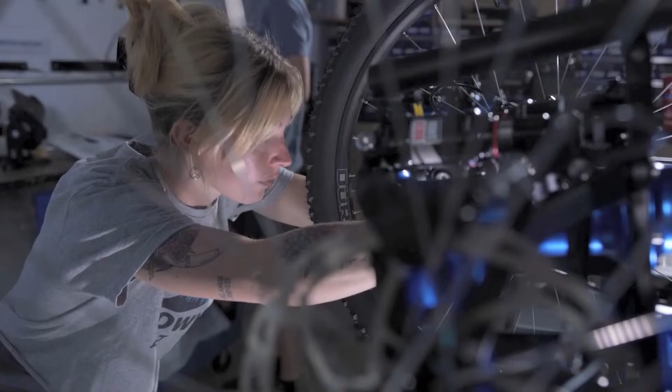Implementing open and real-time lines of communication between our engineering and shop floor is critical to getting parts produced and out the door on time. Communication across a company is important, no one's going to deny that. But ensuring that everyone within the company has access to a single source of truth and is making decisions based on the same set of data is imperative. Otherwise, we may just be guessing at the latest revision of a file and producing nothing but scrap.

With the Delmia manufacturing portfolio inside of 3D Experience Works, data is collected throughout the entire process, starting with analyzing the part to shipping it out the door. All stakeholders have real-time visibility to make fast and accurate decisions.

On the quoting and planning side, you have access to Delmia's manufacturability check. Here, you can virtually place a part onto your machine and check for things like standard hole sizes and deep or flat-bottomed holes. You can set manufacturing parameters for your machines to help analyze your manufacturing processes, both on the additive and subtractive sides. If you find any issues, you can use the markup features to send the details directly to the engineer using the integrated communication tool.

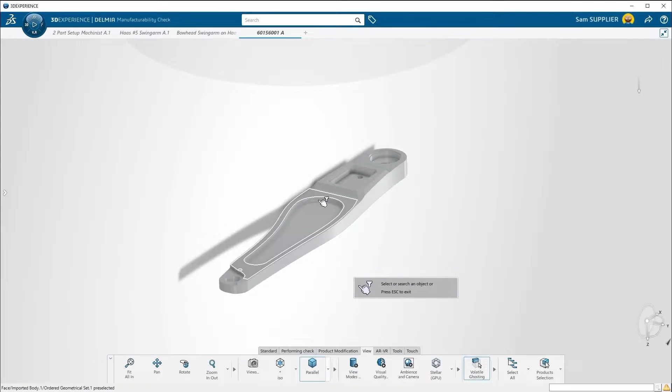Easily add text and graphics, then take a snapshot of the 3D model and send it out for review. With the changes made and the part finalized, there's no need to reopen and reinsert the part again. You can simply replace the existing part with the new revision.

After running it through the manufacturability check one more time just to be safe, we can send it off for manufacturing. When it's time to start programming the part, just open the machining cell that we have created in Delmia's shop floor machining. These machining cells can be saved as a template to include any tooling and fixtures, thus eliminating the time-consuming task of loading tools and placing vices.

Delmia's shop floor machining takes a lot of the guesswork out of your programming by including easy-to-follow pop-ups. Your toolpaths are displayed using kinematics of your actual machine. Delmia creates a virtual twin that accurately shows what will happen on your shop floor without the risk of crashing your machine in real life.

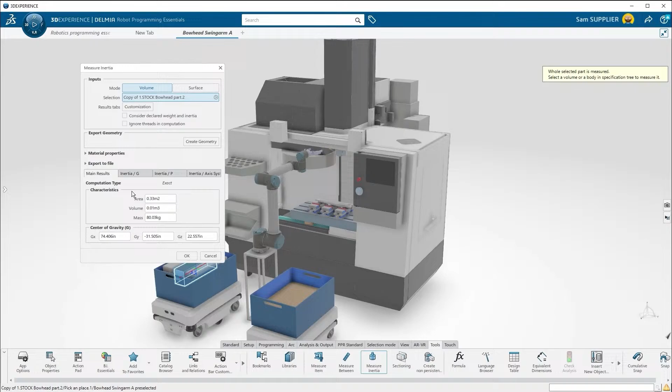Industrial robotics are becoming a standard these days in almost every manufacturing facility. Although the use of industrial robots has become more common, programming them can still prove challenging. Delmia's Robot Programming Essentials gives you the power to easily program and simulate robotic arms. The programming is done completely offline, so your equipment can stay up and running while you program and simulate new tasks. Delmia's Robot Programmer lets users easily place robotic arms and shows possible locations based on the robot's reachability.

A true virtual twin can be created by combining our manufacturing cells on the factory floor. With Delmia Factory Simulation Engineer, users can simulate and optimize material flow and resources using a virtual twin of their facility. Users are able to optimize layouts, plan for expansion, and create flow studies to track efficiencies, all while using an accurate, scalable representation of their production environment.

Whether you're programming CNC machines and robots or creating optimum production floor layouts, the 3D Experience Works manufacturing solutions are ready to help you expand your horizons.

Well, there you have it. Some incredible enhancements to SOLIDWORKS this year, and also some next-generation applications provided to us through the 3D Experience platform. We hope you've enjoyed the show and that you will be as excited as we are to put these new tools into action. If you want to find out more about the tools you've seen today, or better understand the tools you already have, don't hesitate to get in touch with your local technical team for more information.